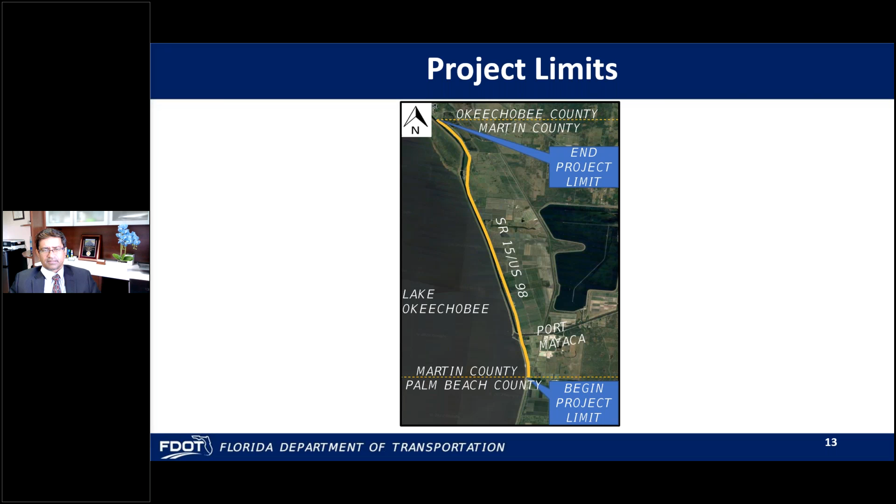Slide 14. The proposed improvement includes repaving the existing roadway, and we will also widen the shoulder to provide 12 feet, which will include 7 feet of paved shoulder and 5 feet of unpaved shoulder.

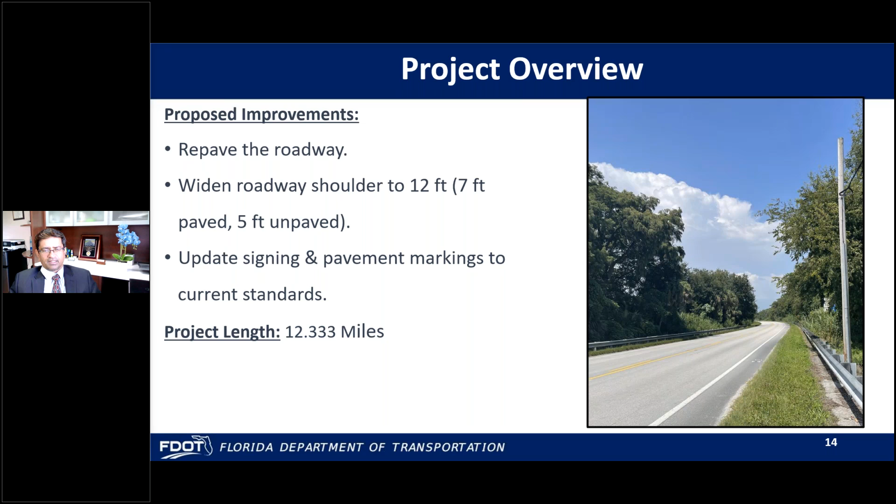Also, all the existing signing and pavement marking will be upgraded to current standards. The project length is a little over 12 miles.

Slide 15, existing roadway. Slide 16, this exhibit shows the typical roadway section.

As you can see in the middle of the screen, two arrows indicate a 12 foot travel lane in each direction, with 8 feet total shoulder, which have 4 to 5 feet paved shoulder, and the rest unpaved shoulder. The project road right of way is about 66 feet.

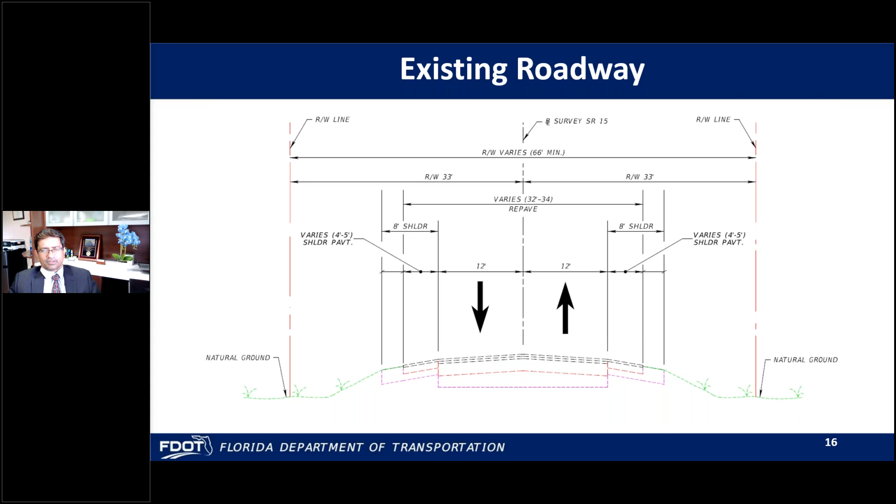Slide 17, existing roadway condition. There are a couple of photos showing the existing roadway on the right side. As you can see, two lanes are shown, and the project has some straight line sections as well as some curvature.

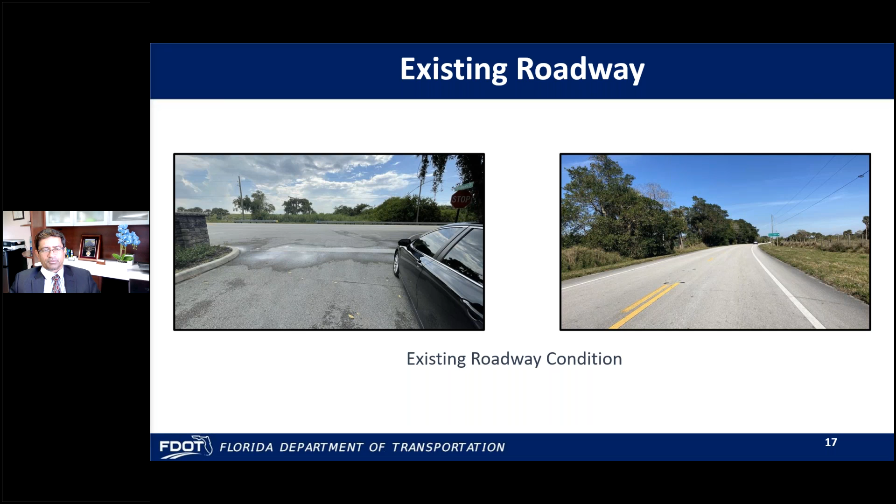On the left side are shown some of the driveways. The project has several residents and properties with driveways shown on the left side of the pictures.

Slide 18, proposed improvements. Slide 19 shows that the proposed typical section is similar to the existing one shown earlier. As you can see, the middle still shows 12 feet, 2 lanes, indicating 2 arrows, showing 1 lane in each direction.

But the existing shoulders are being widened, so it is proposed to have a 12 foot shoulder, which will include 7 feet paved and 5 feet unpaved. That will require about 4 feet of widening of the shoulder along both sides.

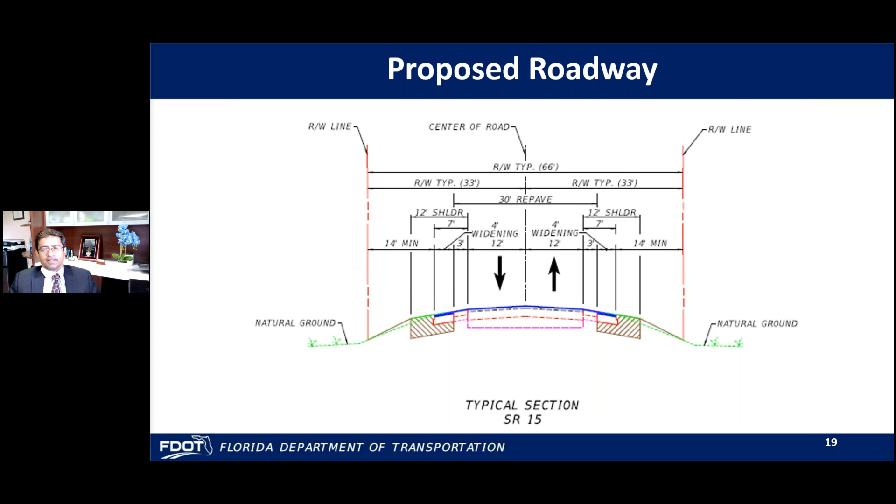Slide 20 shows some examples of the proposed work. On the right side it shows that when the shoulder is being widened, machinery will be used to provide the widening on the outside of the road for the shoulder widening.

On the left side is shown when the contractor will be doing the repaving, and that machinery will be used for repaving the existing roadway.

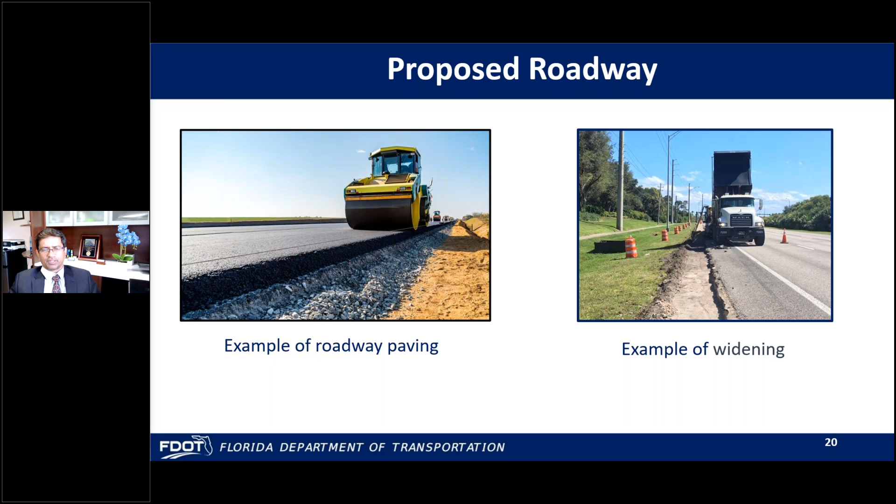Slide 21, temporary traffic control plans. Slide 22, temporary traffic control plan. Temporary lane closures will be done basically during off-peak hours using flagger operation.

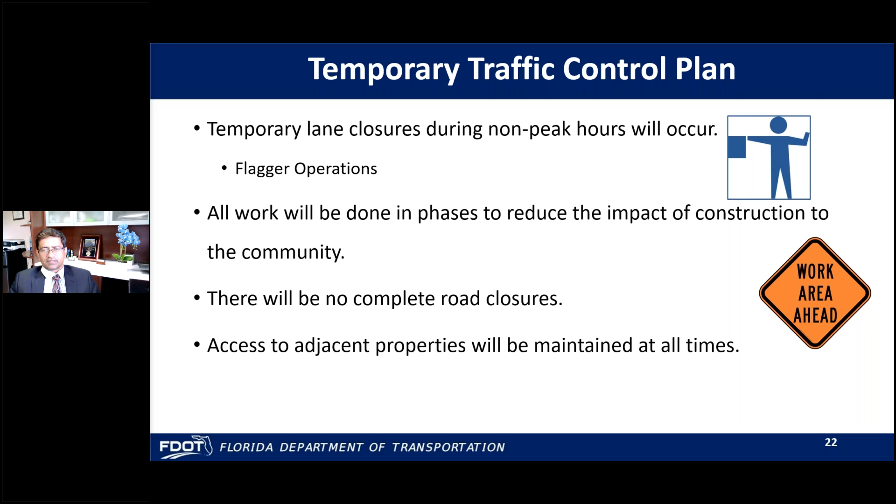One lane will be maintained for use in both directions, performed using flaggers. All work will be done in phases to reduce the impact to the adjacent community and the traveling public. We will not be closing the roadway entirely, so at least one lane will be open at all times, and access to the adjacent properties will be maintained at all times.